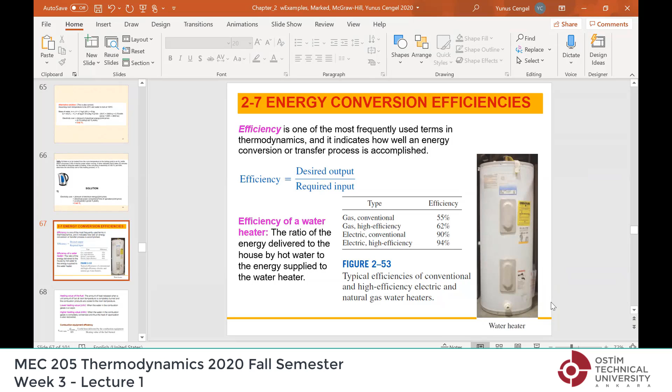May I interrupt you? Yes. I think we can't see slides. You can't? We can see slides. If you share that, we can see both of us. Okay. The system does, let me see. Okay, so you see the slides now? Yes, sir, yes, sir, we can see now. Okay. Mehmetcan can simply cut that part out, since now we have the slide.

Energy conversion efficiency is simply associated with the conversion efficiency process and how efficient that process is. You want to convert energy from one form to the other. Ideally, you would like all the energy, which is our input, to be converted into the desired form of energy. If that happens, efficiency is 100%. But it is not the case most of the time.

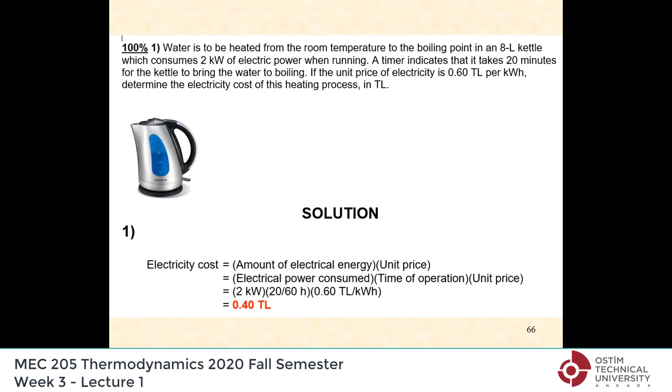Therefore, we define efficiency. The general definition is you have some energy input, and you want to convert it to some kind of output. We call it the desired output. This is the required input. Conversion efficiency.

Many of you have water heaters in your homes. Let's say this is an electric water heater, or it may be a natural gas water heater. Definitely we have some energy input, right? This can be electric, or this can be natural gas. What is entering here? In the case of natural gas, chemical energy is entering—it is the amount of energy released when the gas is burned. In the case of electricity, simply electrical energy is entering.

At the end, what do we want? We want hot water, which is thermal energy. Cold water will enter, it will be heated here, and then hot water will leave.

The difference of the energy of water between inlet and outlet is the amount of thermal energy given as output, as useful energy. The amount of energy which enters as electricity or natural gas chemical energy is the input. If you take the ratio, that is the efficiency of the water heater. If it is 100%, that means all the energy which enters as electricity or chemical energy is now in the hot water as thermal energy with no loss.

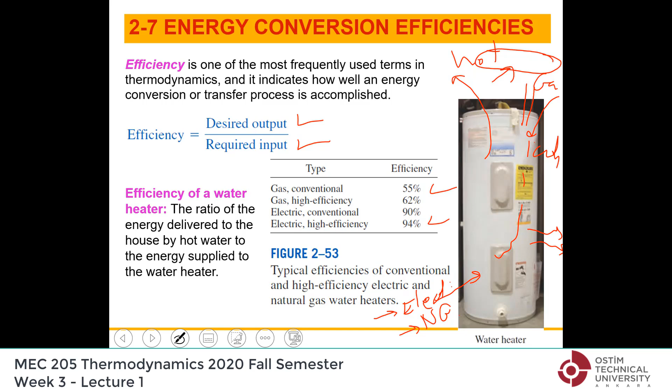If you look at the efficiency values, for ordinary heaters it can be as low as 55%. For electric water heaters, they can be like 94%. These numbers are a little old, so they may even be better today. If you have condensing heaters, then the gas heaters also will have very high efficiency.

Now, how do we deal with chemical energy and the combustion process and the combustion equipment? It can be like car engines, power plants where you burn coal, boilers, it can be anything where you burn fuel. You have combustion, which means chemical energy being released as thermal energy.

Normally we define the combustion efficiency, or efficiency of the combustion equipment, as the useful heat supplied divided by the heating value of the fuel burned.

Now, how do you determine this? You can simply pick it up from the tables. Heating values of all the fuels, chemicals, whatever, they are measured in the labs and they are listed in the tables. You find it very easily, it is the heating value. So no matter what you are burning, you can find it. If not, you can take it to the lab, it can be measured very easily if we have something unusual.

And after the combustion, you deliver some thermal energy. You have high temperature gases there, and that will be the combustion efficiency.

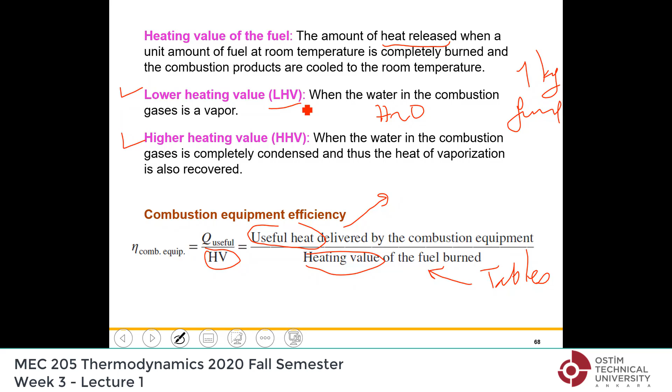When the water in the combustion gases is a vapor, so H2O is in the vapor form, it is called the lower heating value. When H2O is completely condensed, then it is the higher heating value.

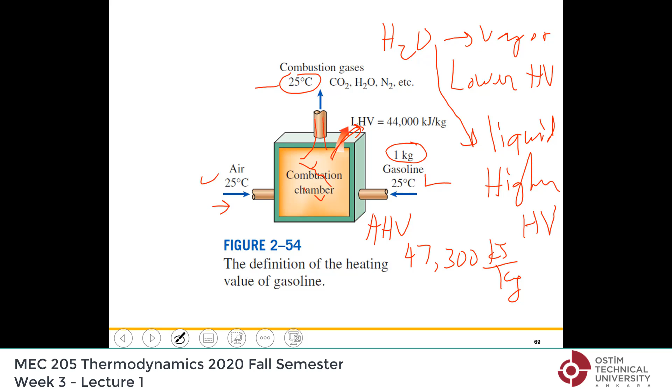The lower heating value, as you see here, is about 44,000 kilojoules per kilogram. The higher heating value is about 47,300 kilojoules per kilogram. But of course, when we say gasoline, it is anything but certain - there are so many different gasolines. Gasoline has maybe 20 or 30 different hydrocarbons in it, and the composition can be different, so these numbers may change depending on where you buy the gasoline. But on average, this is what you should expect.

So what is the difference? 44,000 versus 47,300 - that's 2,300 kilojoules per kilogram. That means the water vapor in the combustion gases, when it is completely condensed, will give you an additional 2,300 kilojoules of heat per kilogram of gasoline.

Can I ask a question? Any questions on heating value, lower heating value, higher heating value, even combustion efficiency? Can I ask if that is correct? Yes.

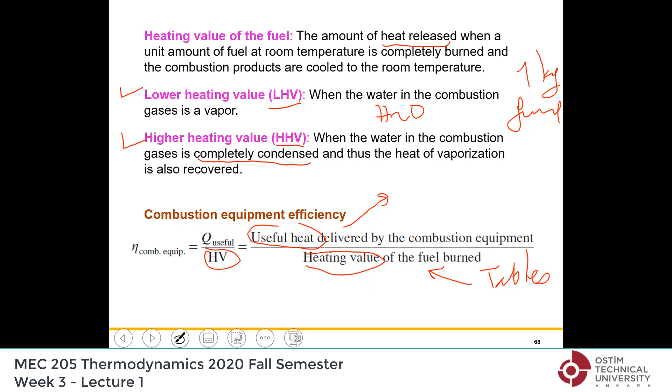In the combustion chamber, we use air with gasoline. Why? To burn it. Because air is the cheapest oxidizer. It has enough oxygen, it's a mixture of oxygen and nitrogen, and we mix it with the gasoline. The nitrogen doesn't matter; it's not involved in the reaction.

Let's say you have about 78% nitrogen. All the nitrogen enters at 25 degrees and leaves also at 25 degrees, so it doesn't make any difference. The oxygen combines with the gasoline in a chemical reaction. Even if you have excess air, since everything leaves at the same temperature, it doesn't matter.

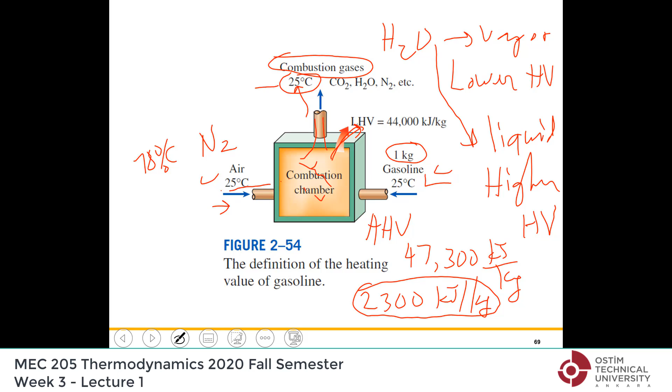This is what we do in real life. In a car engine, we burn the fuel using air, right?

Now for efficiency of heating equipment, in practice you will see different definitions. One is AFUE, the annual fuel utilization efficiency.

The reason is that combustion equipment often doesn't run steadily. Let's say you have a heater in your house that uses natural gas. When the room temperature or hot water system drops to a certain level, the heater kicks in and combustion occurs, then when the water temperature rises to a certain level, the heater shuts off and won't burn fuel until the temperature drops again. Now, the heater is hot but loses heat, and when it restarts it has to heat the equipment again, and that heat is lost. So inefficiencies of this kind occur.

This is something more realistic in real life. If a heater is designed to minimize losses during those periods, it's obviously a more efficient heater. Heating equipment usually lists this number, meaning they consider other things too, so keep that in mind.

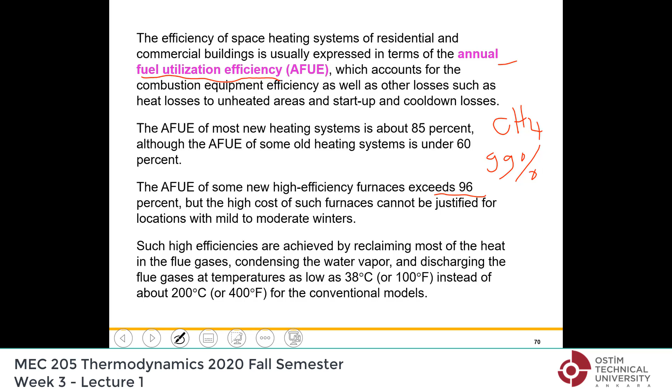Now other forms of efficiency, for example in an electric power plant. What do we have? We have a furnace where the fuel burns, a turbine where the steam energy is converted, and a generator that converts mechanical energy to electrical energy, and they all have efficiencies.

The generator efficiency is simply the amount of electricity generated relative to the mechanical energy it receives from the turbine. Then the turbine efficiency, or thermal efficiency, is how much of the heat is converted to mechanical energy for that part of the system. And the boiler converts chemical energy into thermal energy, so you have combustion equipment or boiler efficiency, thermal efficiency, and generator efficiency.

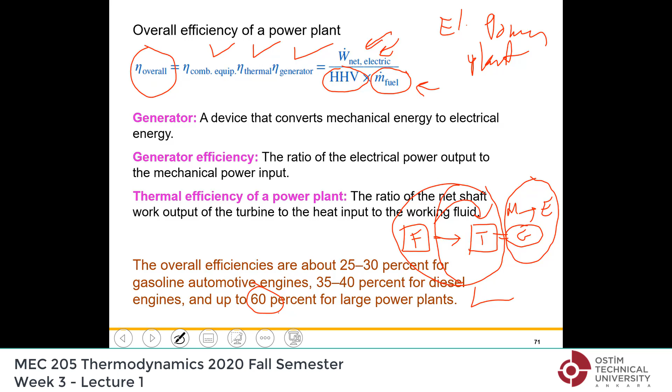So efficiency can be complex. What is this overall efficiency? For car engines, it may be between 25 and 40%, depending on whether they're gasoline or diesel. For large combined power plants with 1,000 megawatt output or more, it can be around 60%. So it changes, but normally you won't see efficiencies much higher than this—at the end, you lose a lot of energy.

Okay, let's look at lighting as a special application. Now, what happens in a lamp? Typically, let's say this is the light bulb, the old kind, or it can be LED right now, whatever. We have electrical energy entering, right? Let's say in watts. And then what do we have? Light energy leaving, light. And we also have, if you touch these light bulbs, they are hot, right? So we also have heat.

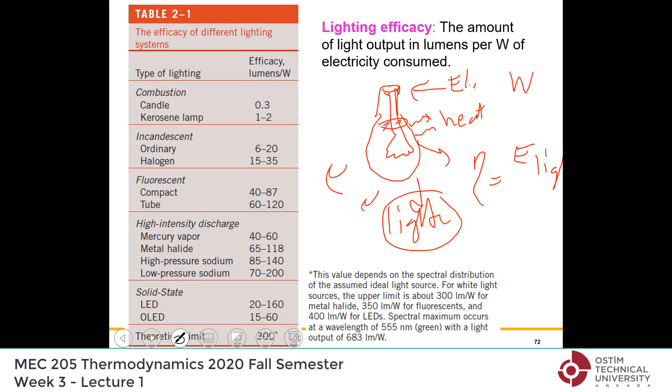Now, what is the desired output here? This heat we don't care, so we want light. So the efficiency here will be the amount of energy leaving as light divided by the amount of energy entering as electricity. This is where we pay the money, okay? And let's see how efficient they are.

In the case of incandescent light bulbs, the regular old-fashioned ones with the filament, they are about 5%. They convert only 5% of the electricity to light. The rest is heat. So they are very inefficient, okay? The fluorescent ones are usually 4 or 5 times more efficient than this, so fluorescents can be like 20–25%. And now we have LEDs, and LEDs can be like 25–30%, or even higher. They are also improving. So you can see the differences in efficiencies here.

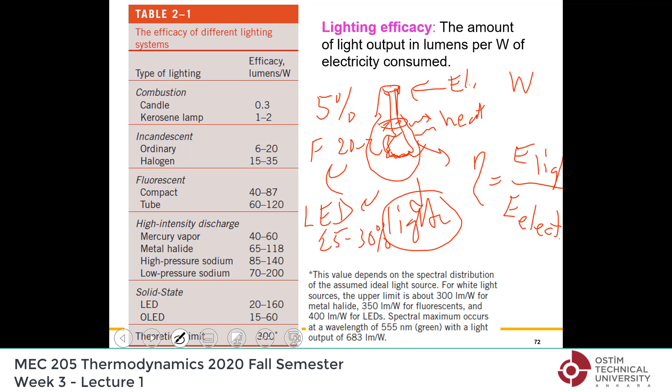And the efficacy of lighting systems is expressed as lumens per watt. This is a light unit. Okay, let's compare them. This is the old type, incandescent light bulbs; you may not even have those anymore in your house. Let's say this is a 60 watt, and it gives out a certain amount of lumens, let's say 600 lumens.

If you use a compact fluorescent light, which gives the same amount of light, 600 lumens, it will consume maybe just 14 watts instead of 60. And if you use an LED light, again giving out the same amount of light, it will consume, the number here is kind of low, but probably 8-10 watts for the same amount of light.

So what is the message here? Obviously, you should not use this one, although it is maybe cheapest to buy. In the past, we would buy this one because LEDs were expensive, but nowadays LEDs are reasonably priced. Therefore, when you need a light bulb to replace an old one, typically you just purchase this one.

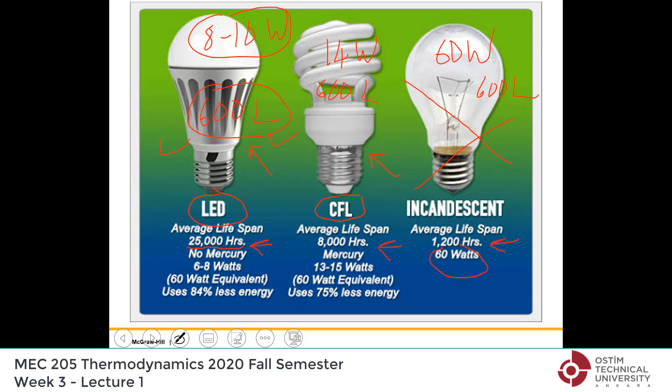Okay, no question. Then let's look at cooking. You know, thermodynamics is a very practical course. You can use it everywhere, in your house, in your restaurant, whatever. Now let's say you are cooking using electricity, natural gas, LPG, whatever. How would you define efficiency? Again, what is the basic definition? Useful output divided by input.

Now, what is the useful output? The amount of heat which enters the pan, because you are cooking something, boiling water, doing other things. So it is the amount of energy entering the pan. Okay, what is the input? This is an electrical stove: the amount of electricity you consume. And if this is, let's say, 5 kilowatts, and 3 units of it enter the pan, the rest is lost as heat to the outside.

Then what is the efficiency? Efficiency is energy utilized divided by energy supplied. So in this case, it is 60%. So just using logic: what is useful here? At the end, I want thermal energy, obviously, and to get it, I use electricity. So take the ratio and see how efficient the system is.

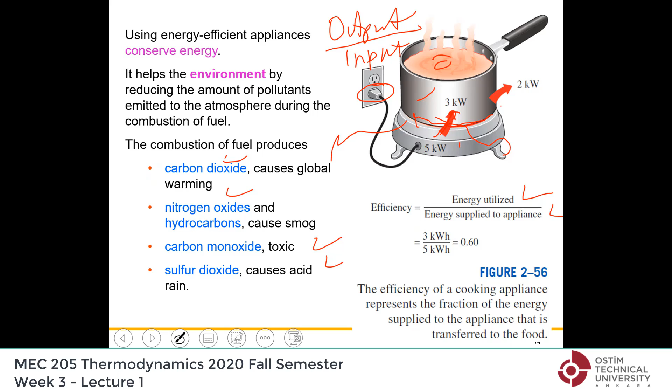Okay, which devices or which way of cooking is more efficient? Now let's say you are cooking something using different methods. So the amount of heat that you need is fixed. You will cook a certain size casserole there. You can do it using an electric oven. It can be turbo, it can be convection or turbo oven.

This is regular. It may be gas. You may use a frying pan, toaster oven, crock pot, or microwave oven. Now look at the results. The cost of cooking, the cost of energy, can range from 19 cents to 3 cents.

So the microwave oven is the most efficient because it converts electricity to microwaves, and then when they hit the surface of the food, they are absorbed. If they hit the surface of the inner cavity of the oven, they are reflected until they are absorbed by the food. So microwave turns out to be very efficient.

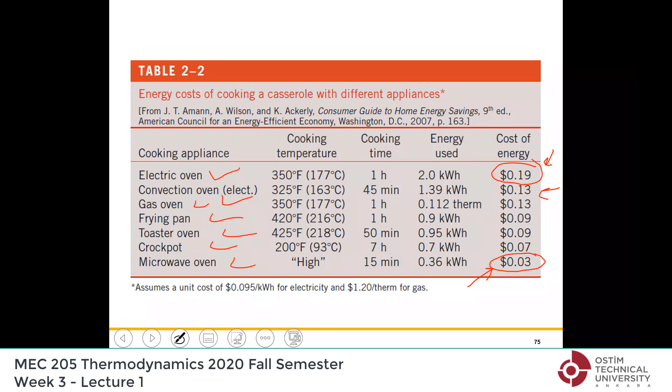Normal electric ovens, not so efficient. If, let's say, you want to use the oven, then it is better to use the convection oven. They are also called turbo because they move the air around, so they cook faster in a short time. Instead of 1 hour, let's say 45 minutes. So the result is instead of 19 cents, you pay only 13 cents there. So by considering the efficiency of the process or equipment, you certainly can save money and consume less electricity.

Okay, let's go through this example. We have an electric range and a gas range, natural gas. We will do the same cooking, maybe boil a certain amount of water to the same temperature. The efficiency of electric ranges is typically high. In this case, it is given to be 73%. But for natural gas, first of all the combustion efficiency, and then a lot of heat leaving before entering the pan, so typically they are less than 50%. In this case, 38%.

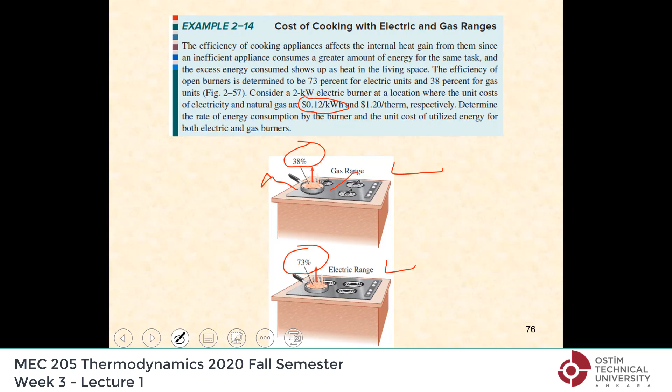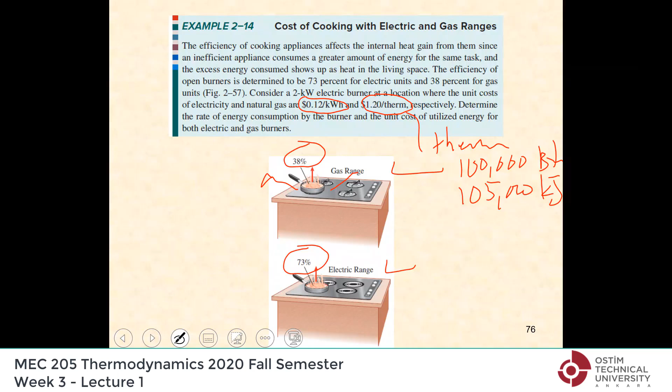And we have a 2 kilowatt electric burner. These are the prices: electricity 12 cents per kilowatt hour, natural gas $1.2 per therm, and one therm is 100,000 BTU in the US, or approximately 105,000 kilojoules. The question is, what is the unit cost of utilized energy? That is, when you take the efficiency into account, which one is cheaper to cook with?

First of all, the electric heater. The burner consumes 2 kilowatts of electrical energy, but efficiency is 73%. Multiply those two, what do you get? 1.46 kilowatts. It means of the 2 kilowatts, 1.46 enters the food because the efficiency is 73%.

Now, 1 kilowatt hour of electricity is $0.12 per kilowatt hour, and the efficiency is 0.73. Therefore, for 1 useful kilowatt hour, the cost is $0.164 in the case of electricity.

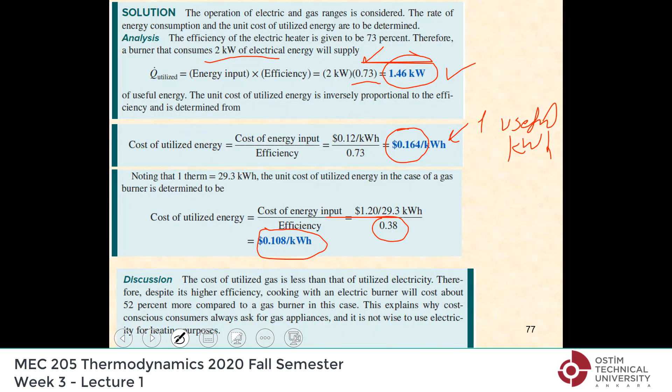In the case of natural gas, we convert it to kilowatt hours. One therm is 29.3 kilowatt hours, and the efficiency is 0.38. It is like you supply almost 3 units of chemical energy, and only 1 unit is useful. When you do that, you get $0.108 per kilowatt hour. So this is the natural gas, and this is the electricity, again for 1 kilowatt hour of useful energy for cooking.

And this is typical. Even if you do this using the values you use in your house, in Ankara or wherever, you will find similar results. Natural gas typically will cost you half as much as electricity. But if you use LPG, liquefied petroleum gas, it will cost you twice as much as electricity and 4 times as much as natural gas.

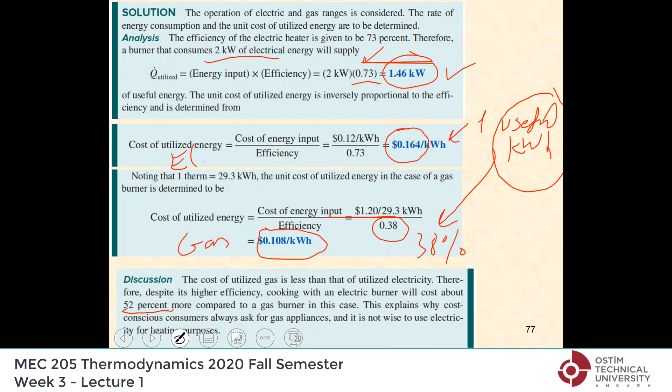The funny thing is, most people use LPG tubes for cooking. Some even think it is cheap. It is not. So if you have natural gas in your house, you should use it. And if not, you should use electricity. Otherwise, you will pay twice as much for the same cooking if you use LPG. Is that clear? Any questions on this? Okay, so it is clear.

Now, before we go into the efficiency of mechanical and electrical devices, break off and then we will continue.